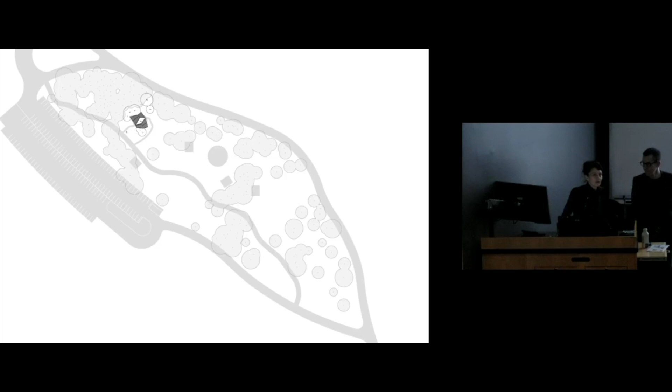We're going to start with that, because a lot of our projects—and we'll show you one of our house projects—often begin with the privilege of doing a pavilion that then turns into a house. So starting with House of Trees at Crystal Bridges Museum of American Art, we were given a site among, I think, 4 other firms, right outside of the museum grounds, near the entry.

When we went on site, the first things that impressed us were these very tall trees, in particular the one single tall tree in the middle—I'm not sure what kind of pine it is, but it's definitely a pine tree. We wanted to incorporate that tree into the architecture to create an immediate conversation between building and nature. All the other sites were more open, so this one was the most challenging since it was pretty dense with trees, and we obviously didn't want to take any down, as it was a temporary pavilion.

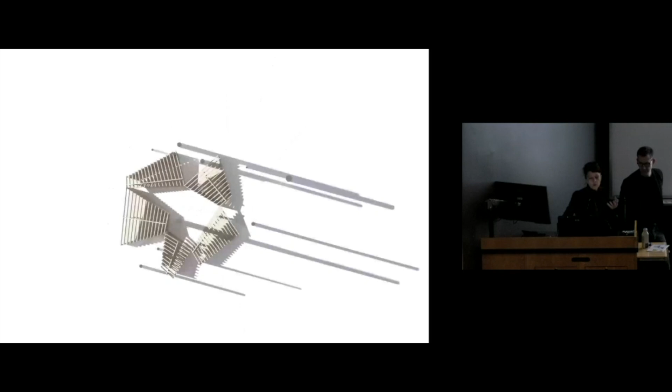So we mapped each one of the trees and then began to think about an open pavilion - that's the guy in the middle with his friends all orbiting around it. The other important thing, which we'll talk about with both, is that it was not only a pavilion amongst trees, but this integration of landscape and nature with domestic space, and it was also about using timber, local timber, which we'll talk about.

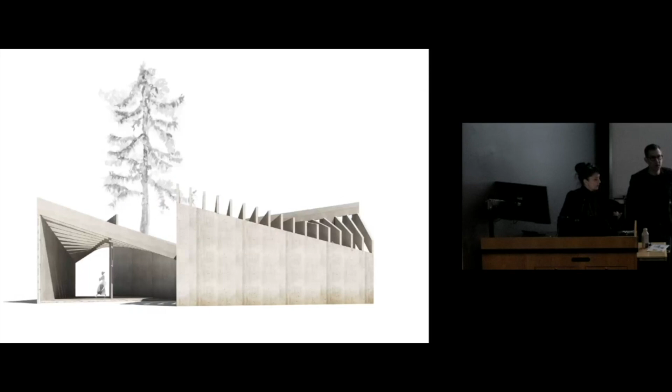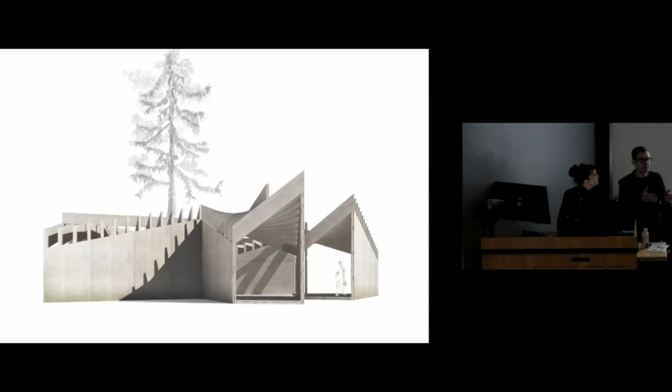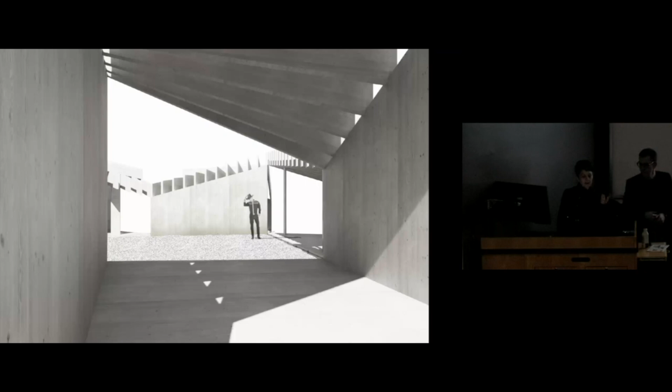These are initial studies of the pavilion, and we boiled it down to mass timber glulams, very deep, 24 inches tall, which may look familiar - we'll get back to that - and CLT panels, cross-laminated timber panels. So this combination between something slatted that filters light, and something flat that might receive a shadow, and they aggregate around a kind of open courtyard.

So this is the piece itself completed, the tree in its location and the pavilion wrapping around it. All the pavilions played with this ruled surface, where the two plates are at opposing angles, so the glulams create an implied curve as they move across.

We then removed certain CLT panels, removing the plate, and placed girders on top in order to hang the other glulams with these very skinny columns, creating a whole series of structural problems - in a great way, things to be solved.

So hanging girders versus bearing girders. We work with our structural engineers a lot, not just solving problems but finding the design potentials in the tectonics of supporting stuff. We love this - you'll see it throughout our work, and we're going to talk a lot about it today.

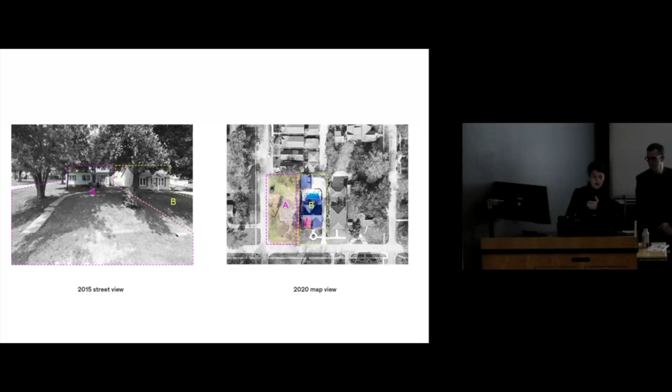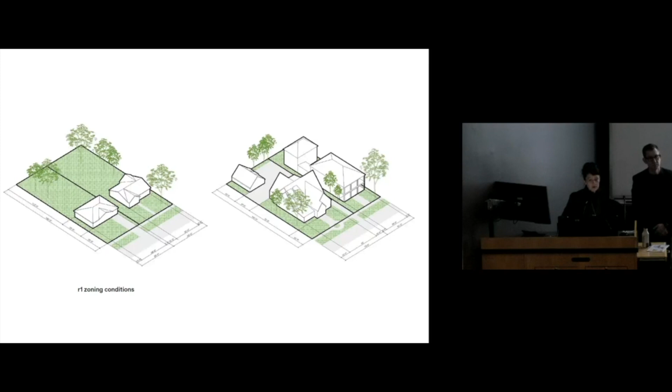We were really looking at this particular district, residential zone 1, seeing a single family house on a single lot. Then what was happening on the right was these very, very large houses being built. So you know what that means—it's slowly becoming unaffordable to be in this area of downtown Bentonville, which is walking distance to the center of Bentonville. The city's also been growing very quickly.

If you don't know what Bentonville means or was started by, it's Walmart—the Walton family that started Walmart. So there's a lot of economic pressures; it's an incredible center of wealth in what's largely a not-wealthy state. The Crystal Bridges Museum is also part of the Walton family.

So what we started to look at is the single family lot on the left, where as the houses get bigger, the cost grows. We started to speculate a different type of zoning configuration where you could take those same 2 lots, but once combined, begin to think about higher density—still low density in terms of the urban context—but where you begin to have different family configurations and densities occur.

One of the things we studied is where this settlement pattern of the single lot and single house comes from. It's a European model of land ownership. We looked at the Osage peoples who had inhabited this landscape before, who were semi-nomadic, farming, foraging and hunting, who clearly had a very different conception of ownership or non-ownership of the land.

We obviously couldn't propose that we would make a forager society in this landscape. However, we were interested in challenging this, and we thought about how we could perhaps start to mix this up, and also mix up concepts of ownership using land trust models of overall aggregated lot, block, and parcel ownership, counter to single family, single lot.

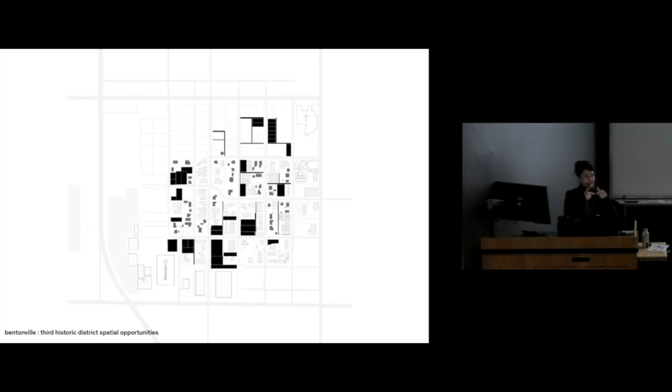One of the things we did is we looked in this third historic district that David was talking about. We started to look for opportunities, empty lots. We also found some very interesting alleyways that were not official roadways, but because if you start to combine lots and aggregate, you have to think of ways people can get to their unit, both vehicularly and otherwise, even for emergency access. So we found this crazy opportunity where there were these alleyways we could utilize if we started thinking about a new zoning configuration for aggregating.

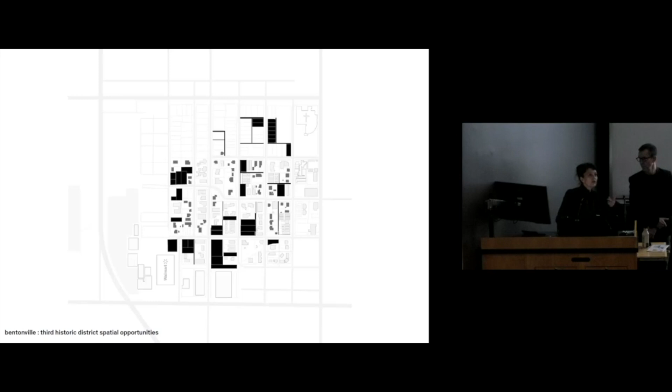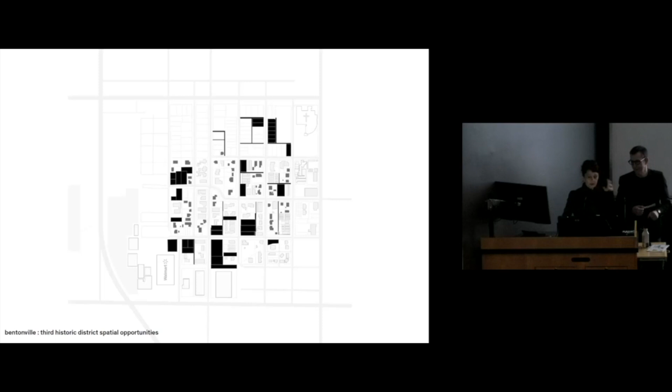Alleyways are obviously mid-block. They're not on this street structure that is, quote unquote, controlled. They're perhaps more free in a way, and might provide more opportunities for discovery. So we took videos and tons of photographs and began to map the neighborhood and find opportunities where there are these open lots.

Simultaneously, we were also looking at different family structures. We're in a different place, and the idea of the single family home and a traditional family structure is not the way we necessarily live now. So we were looking at different types of structures that could exist, and also just looking at the expected growth in Bentonville, their projections for 2035, and understanding the need that was coming.

Then we also looked at the vernacular houses, the single pen, the central hall, the 2-story, the dog trot, just as a way to understand what some of the local architectural tradition was. And then we began to think about prototypes.

And then, of course, composition—how do we apply design ideas to this? A lot of these are really riffing on the porch, or an interpretation of the dog trot house, with a lot of porosity and an idea of a courtyard scheme. And then, which we'll show you when we look back at the urban aggregation, the challenging of the sort of front and rear yards. So we did a whole series of models studying this sort of aggregation.

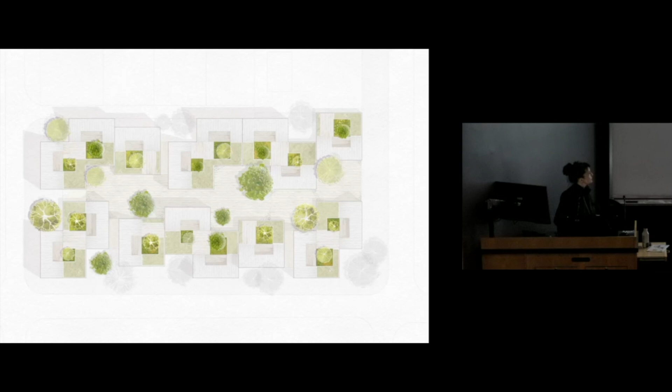The space is inside the houses in terms of courtyards, but then also the space inside the block as let's say private to a house versus public, in an inversion of where a yard may be and what a yard is and how it's used.

So in these prototypes of aggregated components, beginning with the square inside the square, we started to look at how single families, however they're defined, become separated, but the unit as an aggregated component gets put together, and then that forms an architecture.

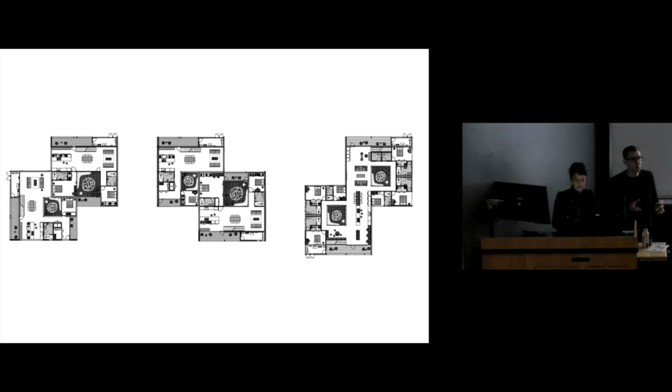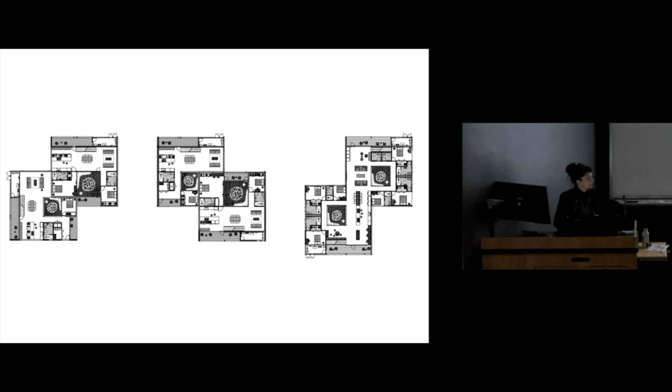And the two on the left here are two different ways of doing that within this system, and the model on the right is a full-on co-housing concept where people have individual rooms clustered around tree courtyards and then large communal spaces running all the way through the building and connecting to the street and then back into that courtyard you saw in the middle of the block.

One of the things we love to do in our models is use our model making methods as a feedback loop where we begin to consider construction systems. The construction system we were playing with and learning about when we were doing this project had to do primarily with cross-laminated timber panels, like you saw in the pavilion, coupled with glue lams for longer spans.

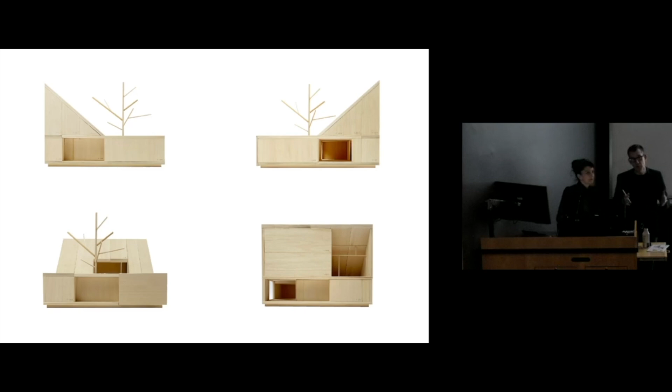Working through that—and we're working on this on a couple of different projects in our office right now—the reliance on CLT, we began to think it's a little too far, a little too expensive quite frankly, and too much of a usage of material. So hybrid systems where perhaps some CLT were needed for shear, glue lams needed for span, but even traditional stick framing, or deep straw-insulated or cellulose-insulated panels where one didn't need either shear or gravity, would be a lot more efficient and would even sequester a lot more carbon.

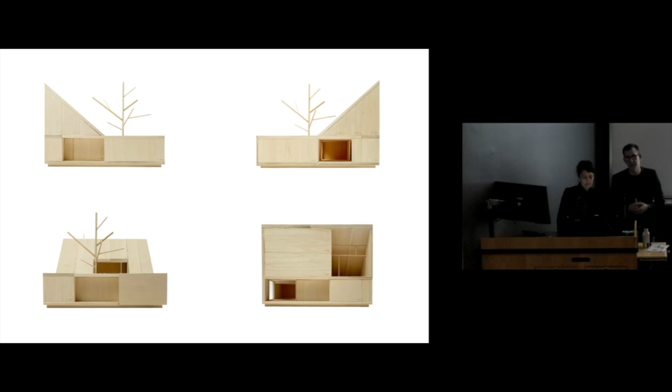So in this model, you can see the ideas of where the CLTs are, but then also the sort of furring systems where airflow would occur between the structure and the rain screen.

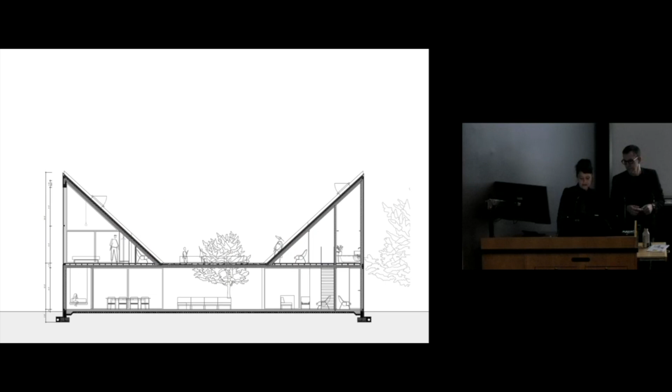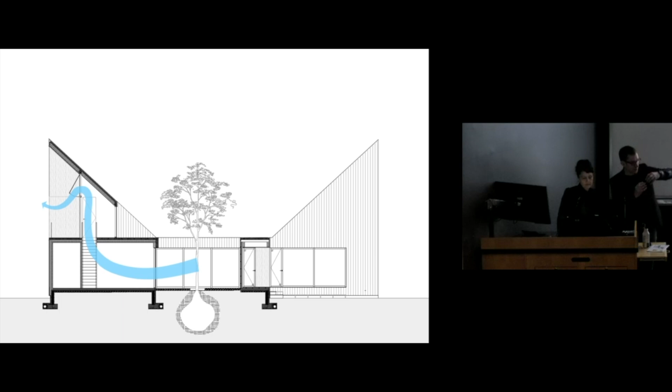And so you see that in the section, but I think the drawing really speaks to. So the airflow goes from the courtyard up through the building, through stairwells, through open spaces, up into this very tall second story space. So all the houses had this sort of pointy little, fairly large second floor space, kind of a wonderful space to be in.

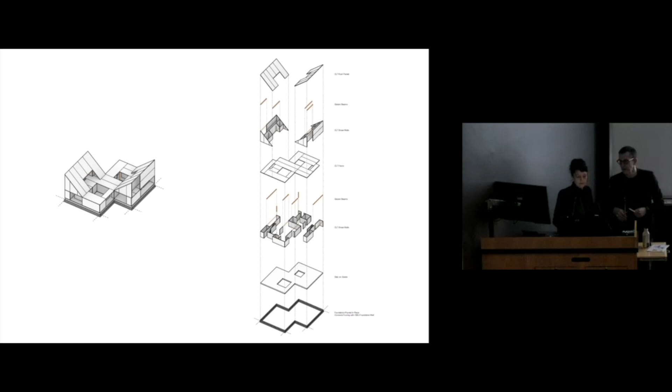And then this component diagram speaks to the CLT panel system. We even ran this by our structural engineer in terms of orientation of planks, length, maximum lengths versus typical widths of panels, where glue-lams are used, the types of foundations, which are much shallower in Arkansas than where we were used to working in New York State in residential projects, and roof and fenestration systems.

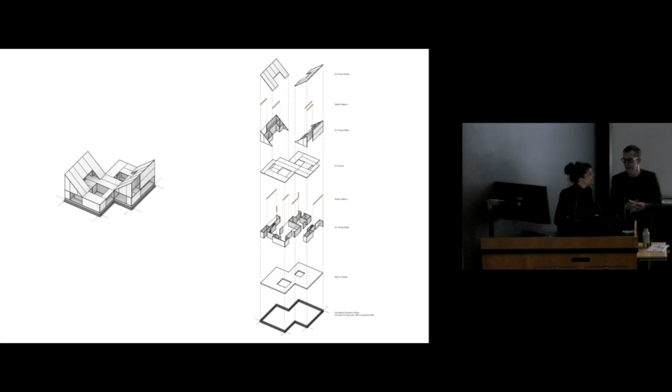And then these are just the final renderings or versions of this aggregation, which we'll show again in terms of the specificity of where they're located. But you see the interlocking, the idea of even shifting these off one another.

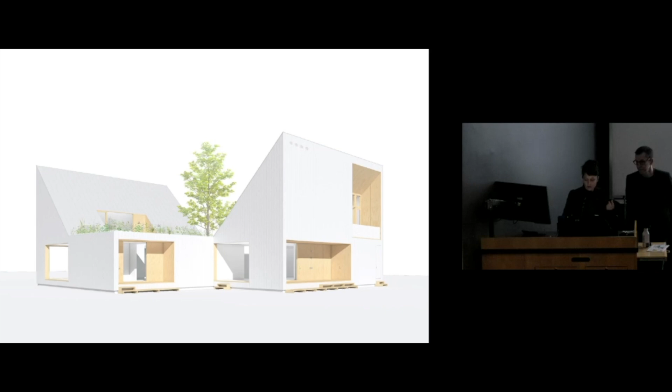We're going to talk a lot about variation of entry points, so that it's not just front and back, but multiple points that allow for individual experience of your unit. So these are just again images of the aggregation of these units, and you can see the entry porches and the upper level porches that take advantage of that cross ventilation with the courtyard.

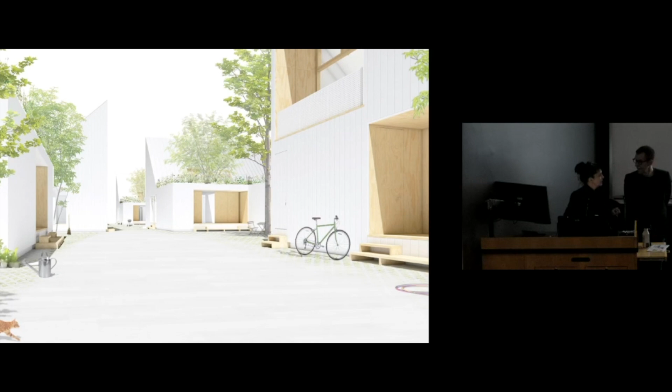And this is a really important point, and we're going to look at the site plan in a moment. But what's traditionally a rear yard, we've eliminated the individual lots, so this is a common rear communal garden, shared by these units. So it's a semi-private space. We'll talk about it when we see the urban diagram.

So the idea was, sorry to interrupt, it goes beyond the functionality of you live in a house here and you go shop somewhere else, or you have services somewhere else. The contention was you could mix up the zoning of the lots and the blocks. You should also be mixing up programming so that people have greater access, which enables child rearing and the elderly living in these communities, because they have much less distance to go for services.

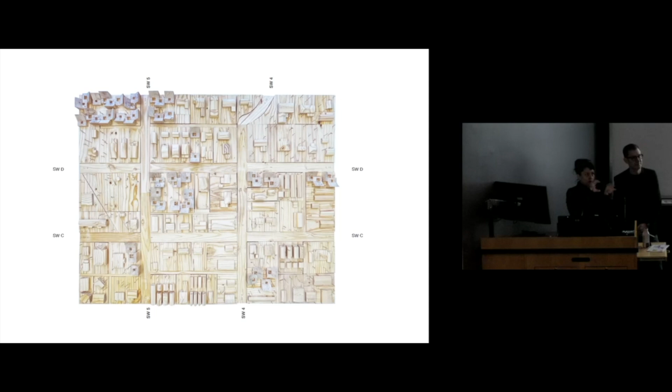We won't go into these in detail because I think we should move on. But as you probably saw in the video, we were literally swapping out, these are like puzzle pieces on a magnet, and we were able to swap these out and then look at this aggregation. You can see the common rear yard and then the different entry points, the different patio entry points, that allows for access but also creates variation.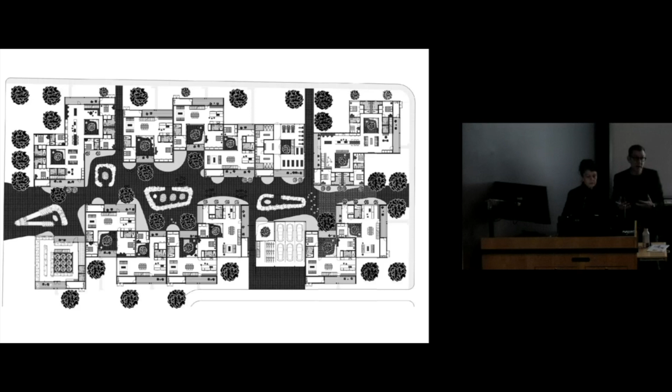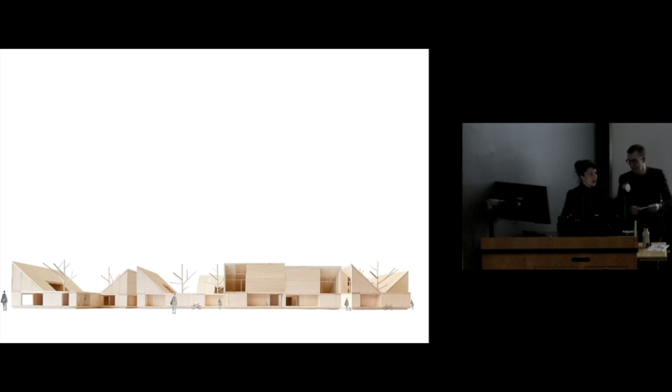The vibrance of gardens, communal gardens, spaces to hang out in amongst the buildings is as important, as equal weight as the design of the units themselves. There's housing, laundry, gyms, greenhouses - all types of programs considered and drawn into that. And then the different entry points, so it's not all frontal - because of the shifting, you can enter your unit off of the side. Then there's this rear yard communal space, and the interior where you see from inside to outside to inside to outside, which comes up a lot in our houses.

We're going to jump now to the complement to this - a deep dive into the 13 houses we've designed and built, and we're going to show you 2 new ones. One was at the very end of the book, still under construction, and we're sharing photos for the first time. We'll go quickly through the ones that are in the show since you can see those, and talk about the ones that are new and exciting to us.

As mentioned, the whole idea was there's not really one way to design a house. It has to do with site, climate, materiality. This idea of comparing 13 houses, 13 sites, all on the same site model, but looking at the topography and the relationship of the house to the site was an important aspect of the book. There are different essays that take the house apart - doors, windows, steps and stairs, structure, house plants which have to do with nature - all part of this comparison of the 13 houses.

This is just a comparison of the houses. You can see from the very, very tiny one in the middle to the largest house we ever designed right next to it. It's fascinating to see the scales of occupation you can take on as an architect.

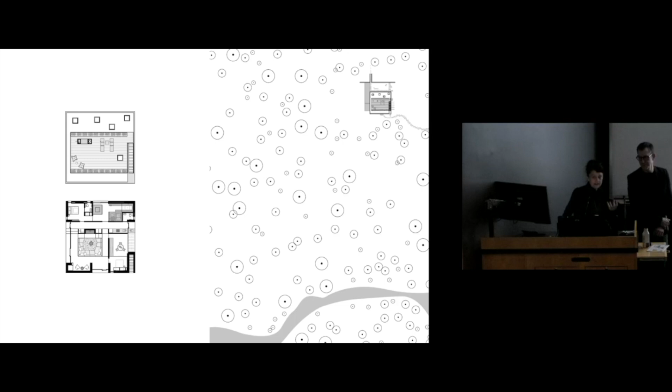This is really a planimetric diagram of the house. One thing we're really interested in is the informality of a lot of these houses, where you can enter from any room. This house doesn't privilege one side or another - you can enter from any facade, and because it's a square, there isn't one side that's more important than the other. This is part of Thick and Thin, where on the drawing to your right is the detail in the wall section. We had a lot of fun devising our own hatches for the different materials to create an expressive representation.

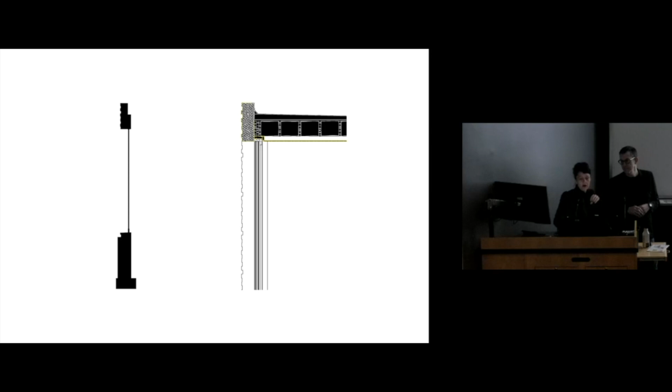We're fascinated by modes of representation, and we wanted to dig into what is in those thick and or thin walls. So it's concrete board-formed concrete, but then with a wood roof.

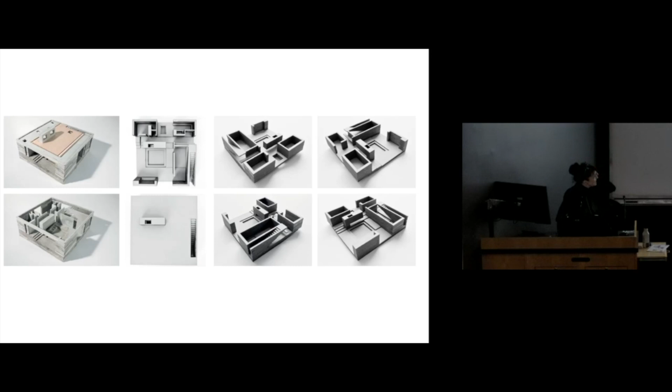The chipboard was first a positive, and then it became a negative, so that we could cast against it, and then it turned into concrete, and became the positive that then required a different negative in order to form it.

This idea of even the bedrooms, everything, every door, every area that we think is a window is actually a door, including in one of the bathrooms, and then stairs that go up to the roof. Having concrete be both an interior and exterior material as much as possible. But where you see up at the ceiling where that was wood framing, that is sort of plaster and sheetrock.

House of One Shape came out of, actually, this is a house up in Hudson. This came out of another pavilion that we did that was based on a right trapezoid that was called Zoid. We were designing the house at the same time that we were building this pavilion.

Here's another sort of obsession with the courtyard. A lot of times we use the pavilions as a way to think through the project. This is the diagram of this house, a series of right trapezoids that mirror and nest, and each one is a different room. So there's an outdoor patio, a kitchen, a living or dining room, and another patio. It's very much about an interior and exterior relationship.

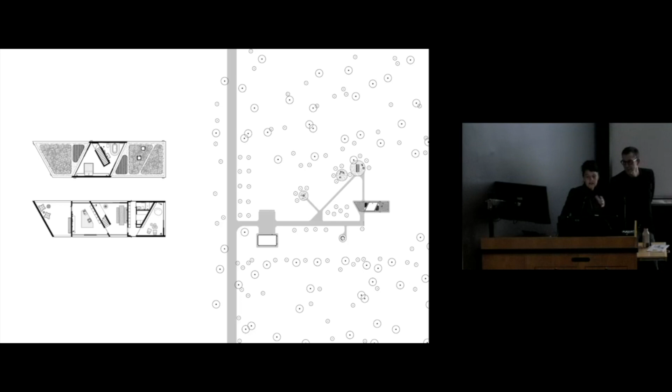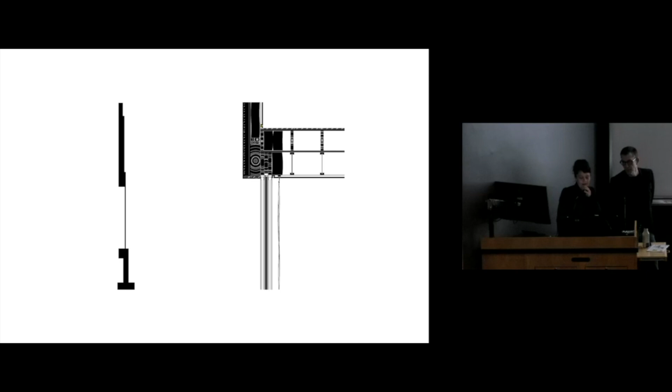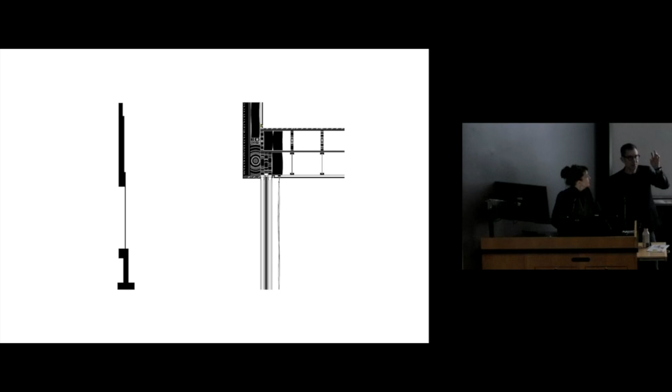And here again is the thick and thin. This is a wood structure with stucco. It's all wood, there is no steel in this house. The second floor has a second layer for both airflow to the upper floor, meaning HVAC, as well as to accommodate a planted roof and the sliding doors going right out to it. So you have to get high in order to keep things low and waterproof.

So this house has stucco on the outside, but as David said, it's all wood framing. It's also lighter, it sits on the landscape lighter. It sits a little bit up, as opposed to the square house that's set into the ground. These are also additional models.

The house is, as Stella said, a series of right trapezoids, and then has a parallelogram on the roof that you can see in this image here, that touches down on the structural points of the right trapezoids below, with a stair coming up in the middle that then creates two triangular rooms. So there's a series of geometric calibrations and manipulations going on in the house that create idiosyncratic spaces.

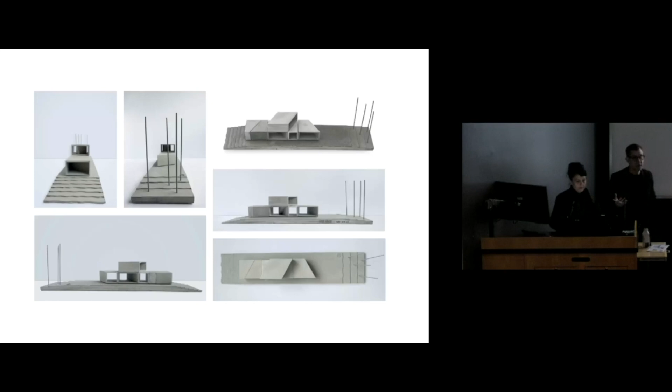The fun of that, of course, is going from these concrete models into actual usable and pleasant domestic space. You can see these plans in the book or even in the exhibition, so we're not going into too much detail.

But the idea was also to have the whole interior be lined with plywood, and only the areas that are wet or exterior, or in the case of the fireplace, had a cement board. Otherwise everything, wall, floors, and ceiling were plywood, and then just the openings of the right trapezoid for each space.

House Without Walls is in Hillsdale, New York. This was very much about the theme of a pavilion. A lot of these projects are, and we're going to talk about that in some newer projects that we're going to share with you. So really thinking about what's the most reduced form of domestic space, just shelter, right? A roof and columns.

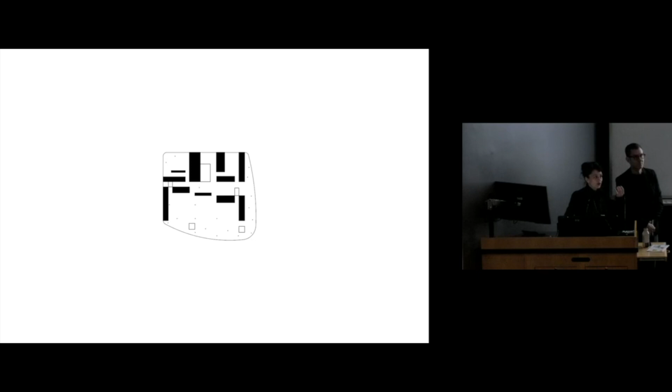And so we thought of this roof with the columns in a series of volumes that ended up just being either bathrooms or closets or kitchen, that then kind of had a loose pattern. It was sort of like a Mondrian painting, where you get the different marks—in this case the different volumes—at 90 degrees in this sort of open pattern. So we said it's a house without walls, because it's really just crates or volumes, but no singular sheetrock wall. So the material is the same on all sides.

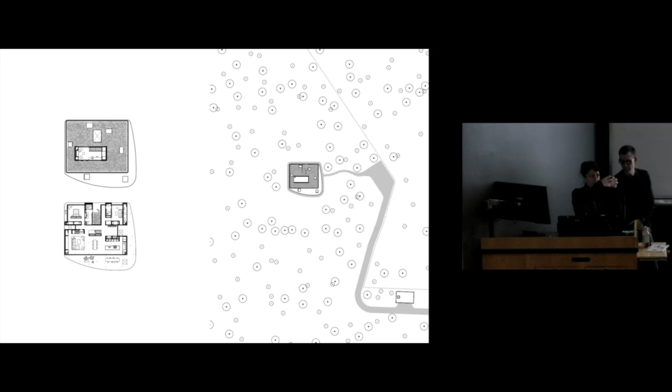And it allows the material to be the same on the inside and the outside. It just looks like a series of boxes under a roof. So you can see that in the plans and the site plan. In this case, here's the thick and thin drawings.

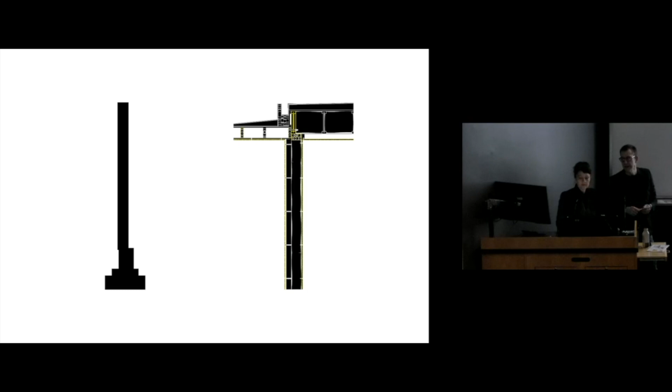This also accommodated a gutter system, a very skinny roof for the patio covering against the thicker insulated roof. The plants—we refer to this as the sponge on top. With the addition of the plants, there's an R value that's incalculable past just the insulation. I suppose we could calculate the soil, but the inspector wouldn't take it into consideration, which is unfortunate. Which is fine, because we met code.

We exceeded code. So the diagram was about this roof, and there were skylights both inside and outside, so again not really differentiating between exterior and interior, and the series of columns. Going back to those initial ideas we were talking about in the House of Trees pavilion, using structural tectonics—the expressive nature of structure—as design drivers and as design inspiration here.

We just love these ideas of pavilions being held up with these skinny columns. Everything, in order to make that happen, has to happen in the roof, and it has to happen in the ground. So we're resolving those forces above and below, and kind of deciding what we're showing and what we're not showing. In this case, we chose not to express where those connections are made, in order to prioritize the space.

And the movement of the columns around those patio spaces, much like you would feel when you're walking through a forest with very tall trees. And there's going to be a relationship to that with a new project that we're going to show you.

So as you can see, we do a lot of model making as a way to understand that process. And you see the aggregation of skylights—some are completely open holes, some are glass skylights but in exterior spaces, and then some are skylights over interior space. So we really like the idea that this roof covers both interior and exterior spaces.

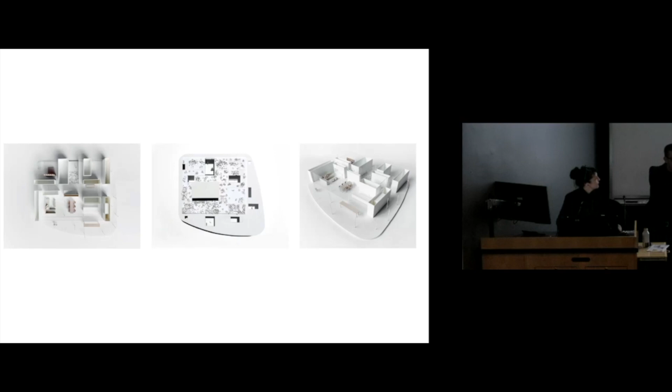So you're seeing the patio roof as the overhang here, but wherever you see the plants, that's the conditioned space—that rectangle is the conditioned space. Using that as the insulation allows us, at the patio, to keep it very, very thin, so that when you view the building, it perceptibly looks like an incredibly thin roof. You see that on the image on the left. On the image on the right, you see a little bit more of that thickness, where the overhang of the sponge is less.

So here you actually see this taken a little bit higher up. It's the back side of the house where there's not a covered patio, and you see that planted roof. We've used that in several of these houses, as David said, as a type of insulation.

And then just really bringing nature in as much as possible. Here you see there's a hole in the roof in the upper right-hand image, as part of that courtyard—so that's also a skylight, not just an opening. You're seeing the material outside is identical to the material inside, so that these boxes read as discrete elements pivoting at 90 degrees to one another, infilled either by glass or space.

No walls. So now we're going to just show you really quickly two new projects. One is—we're calling it '3+1 Ways of Looking at a Pavilion.' So it's kind of continuing this conversation we just had with the last project.

This one is an addition to one of the first houses we did, which is in the book. We're not going to talk about that house, but the clients came to us and asked us to create three new structures: a garage, a studio, and a pool house with a pool. So three separate structures.

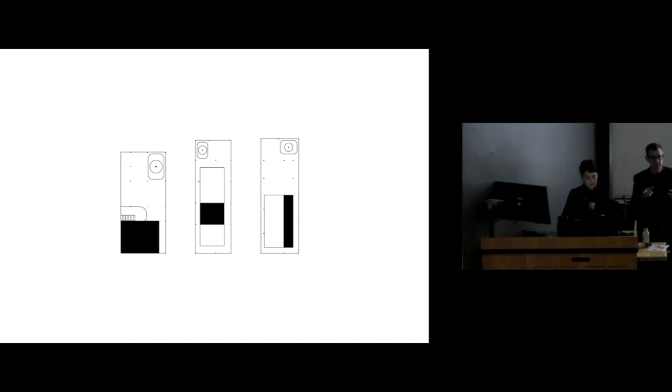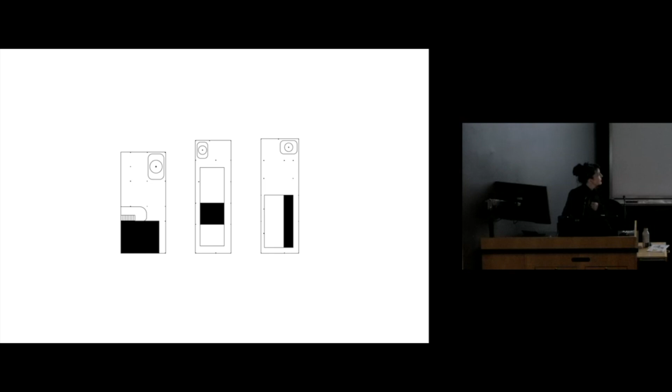The idea is there are enclosed, conditioned spaces that you see in black, against spaces enclosed by glass that are also conditioned, shown with the light lines around the outside. Then the lines around the outside of those are the roof extensions, with trees in holes in the curved shapes inside.

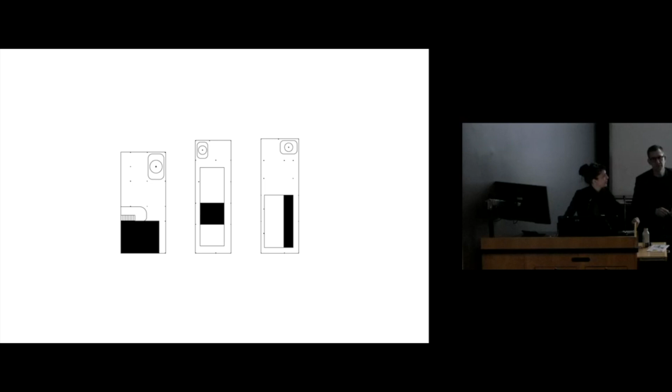You'll see, this is the site plan. You're going to probably have to point. Oh wait, we got a laser. Dick set us up with that, we have to thank Dick Smith for his help on the show. Wait, maybe, I don't remember where it is. Here, I don't remember. Okay, alright.

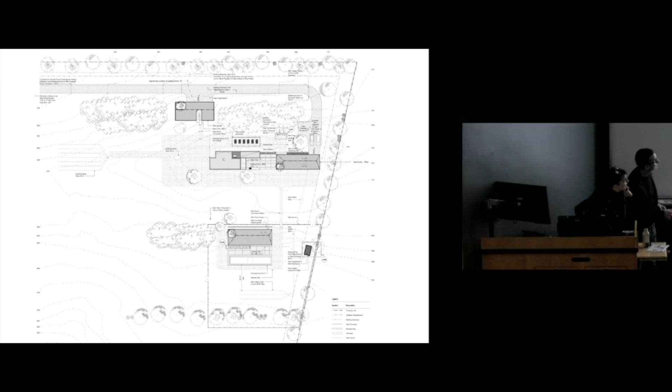That's the original house, which is in the book. But then we have three pavilions that we've added: a garage, a studio, and a pool and pool house. So we're going to go through each one, and they're each a pavilion.

The top was the garage, the middle was the study for the studio, and the bottom is the pool house. We were looking at these different pavilions with a very similar concept: a very thin, flat roof, thin columns, and then some kind of conditioned space underneath that gives you a protected, sheltered space, similar to the last house.

Similar to the last house where you saw the skinny white columns holding up the roof. Those were circles. These are squares and rectangles, and I'll get to that in a moment.

All of the columns, most of them, are pulled to the perimeter. So all the buildings have columns at the perimeter, which is a very different structural condition than floating a roof with columns pulled in from the edges that then have certain degrees of cantilever. There are no cantilevers at all in these.

Because the columns are so skinny, some had to be rectangular to resist certain lateral forces, and most were 2.5-inch squares supporting the roof and tied into foundations. We've worked with the same engineer on most of these houses, and sometimes we'll say it's really important that every single column is the exact same dimension, which is hard because different areas of the house take on different forces.

Other times, like with these pavilions, we're fine with a column having a greater depth in one dimension, because it's a little bit didactic. It's subtle, but if you notice it, in this case we celebrated that difference.

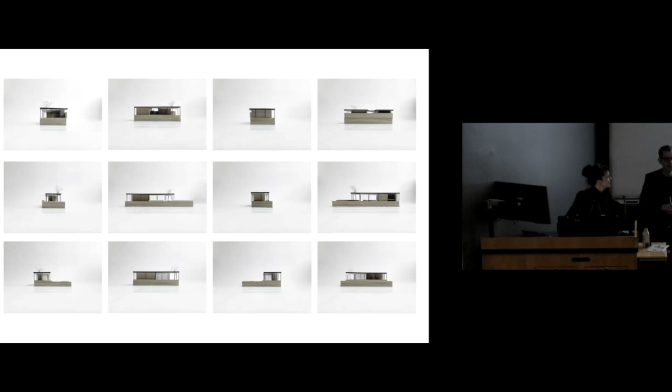Other times, like at the Y-shaped house, the largest house in that lineup, all the columns had to be the same, and literally one column drove the size of all the other columns, and I've never stopped regretting it. So we do stuff and then we change our mind, and then it's like, why did we do that?

So we'll go through each pavilion quickly, and we're going to show you construction photos that are only about two weeks old.

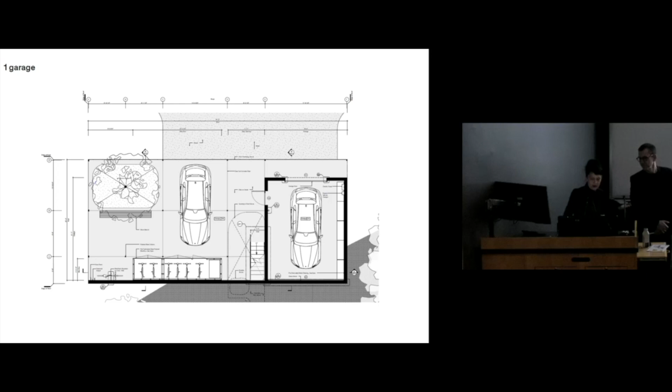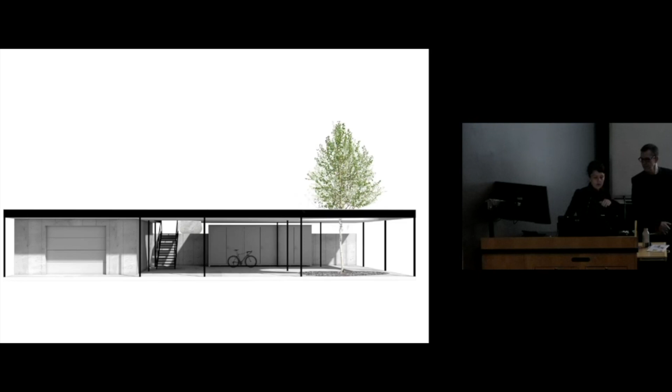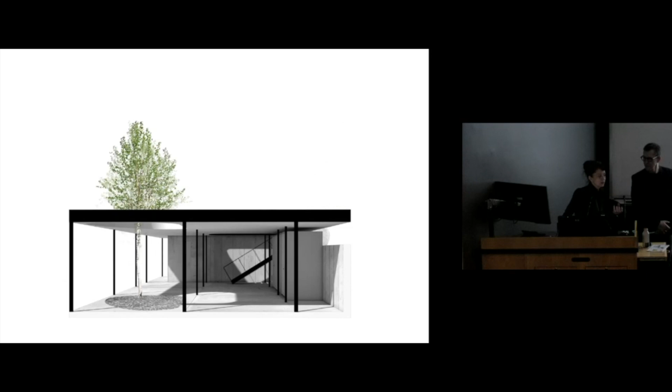This is the garage. It's housing one car, and the rest is a roof supported by columns, with a carport, and a hole with a tree. These are the renderings, showing the volume of the garage itself, steps going up because it sits within a section, and a kind of open carport, patio, or place for bikes. And this hole with the tree shows our obsession with trees being part of the project.

So I was noting the section. This is looking at it from another view where the roof is very thin, and these are the construction photos.

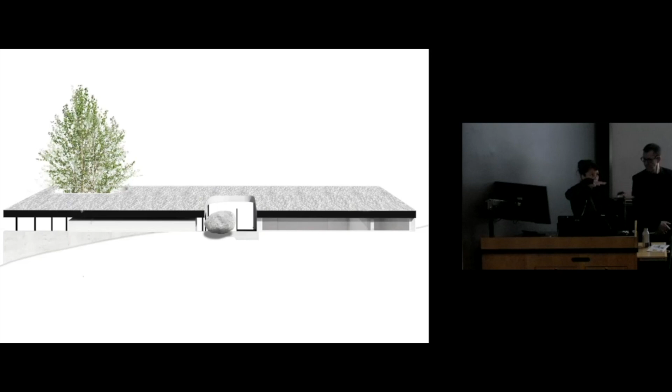This is the exact same image, but because of the landscape of the whole site, these pavilions are in different locations, and the garage is the lowest. So when you're up at an upper level of the other pavilion, you see the roof like this, which is what you see here in construction.

Because once the roof gets all the way out there, it wants to start swinging like a sail in the wind. So once again, the way the columns are tied into the ground and the foundation, and the roof structure, is critically important.

We tend to drive the contractors crazy, but it can't be done any other way, because if it's not done exactly per engineering, the roof's going to fly away.

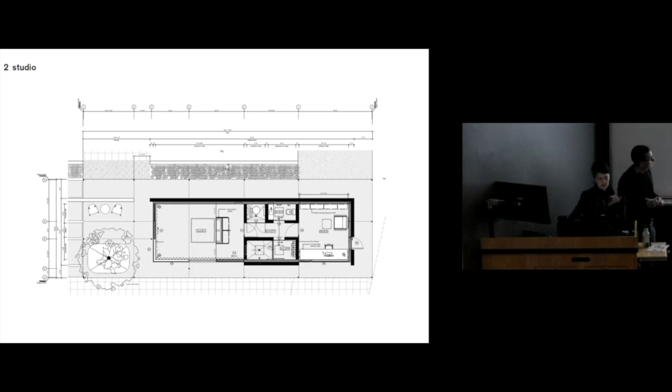So then going to the studio, which is the middle one and adjacent to the existing house, this has a central area with infrastructure for bathing and mechanicals, an office shown on the right-hand side, and an open studio, which now doesn't have the Murphy bed — it's more of an open studio space.

Do you want to talk a little bit about this? This is very similar to what you were just talking about with the house with no walls, in terms of these details that incorporate the wood framing.

2x8s — I don't think anything is bigger than a 2x8 in the roofs, in order to keep those roofs as skinny as possible. They always get thicker than you want them to. So we either accept that and detail for it, or we play, like in the house without walls, a kind of sleight-of-hand game where you make it very skinny, but perspectively you don't see up to the thicker roof.

But we couldn't do that here because you see these roofs at different levels. We did have an opportunity though, because in most areas of these roofs we don't need to worry about insulation, certainly not for the garage.

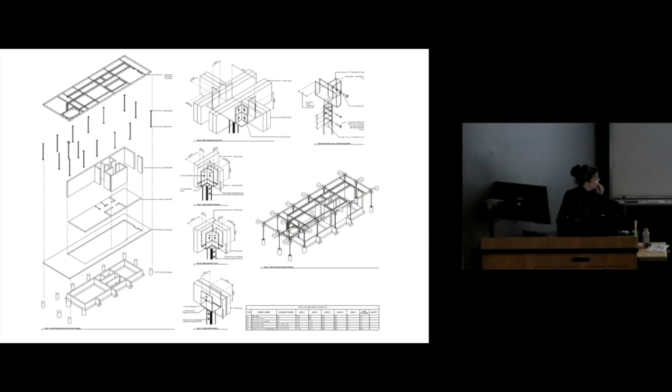We spend a lot of time on how these columns are bolted into the foundation — a lot of time with the engineer determining where the rebar is, and a lot of time with the contractor telling them to move the rebar, because it often goes in the wrong place and needs to be put in the exact right place to tie in with the bolts coming from the bolt plates and the columns above. This all happens beforehand, and it's critically important that we're on site as part of that process with the construction.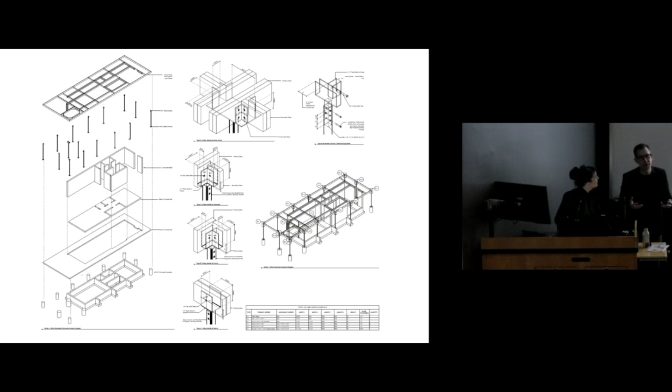Just to note, all of these houses we're showing are in the Hudson Valley, so they're two hours north of New York City. We're in a similar climate along the northeast, but it's a bit more severe climate, so our frost depths are lower.

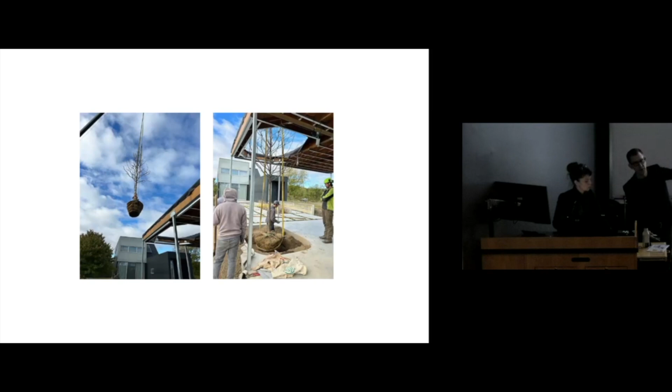Just trees going in. Yeah.

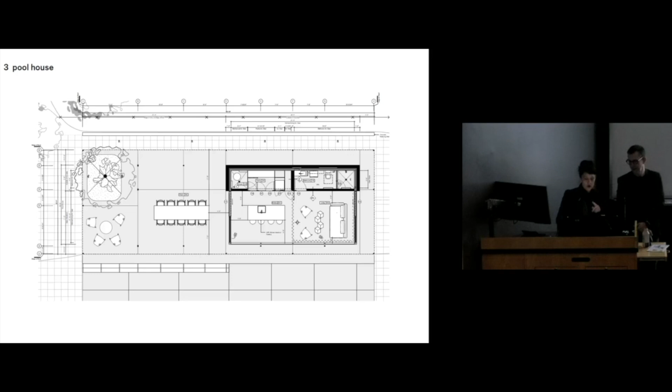The third pavilion is the pool house. The conditioned space is the volume on the right, which has bathrooms, a small kitchenette, and a living area, and then a large open patio and outdoor dining area, again with the hole for the tree.

These are similar details, so I don't think we need to go through them.

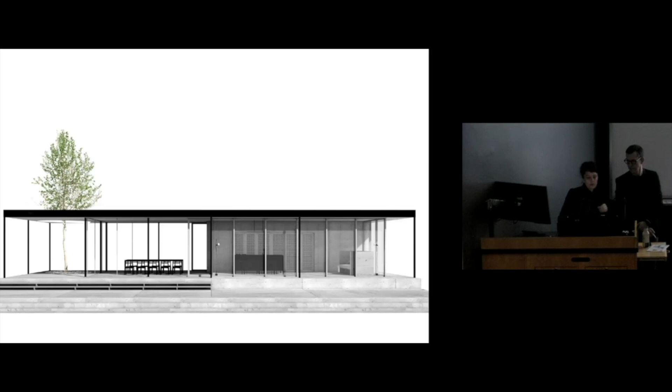Here again you see the pavilion, and you can see that it sits lower, and then you see the studio pavilion a little bit off to the right. Looking at these openings, each one gets a tree as part of that outdoor space.

So the whole project is really about this perception of a building from being within it or outside of it, and seeing the other buildings also in relation to the original house.

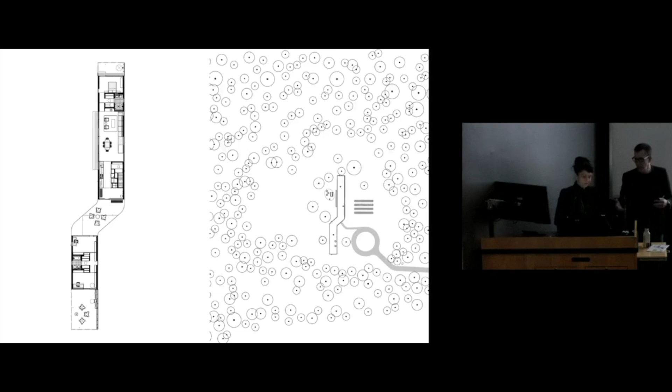These buildings we're talking about are all very pavilion-like. They incorporate the outdoors very integrally with the overall organization. Like Estella said, outdoor, indoor, outdoor, indoor, outdoor. Those are really important organizations for the way we think about buildings.

So you see again this sort of play on this—sometimes you get cold when you walk outside. Here the columns are actually moving to where they need to be. They're not on the edge and not on a grid in the center. They're drifting based on what the needs were from a structural standpoint.

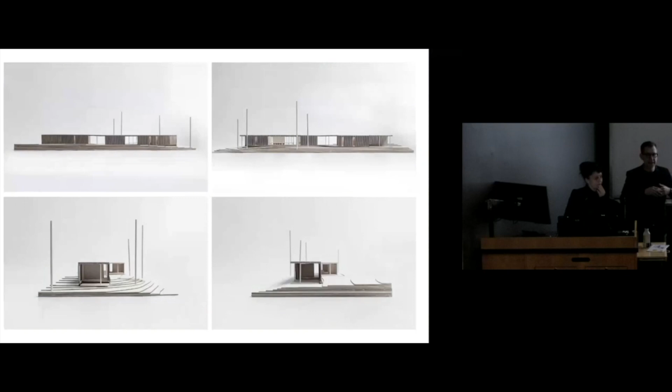This is actually in that breezeway area. We thought about whether we wanted to make that a clear span all the way across. We really loved just using 2x8 wood framing in that roof and a couple of skinny columns, and that's all we needed. We decided to celebrate it instead of going for a heroic span, which would require steel.

For economy and expressiveness, we really enjoyed using the columns. We've had other architects say it should have been a clear span. Steven Holl came to the house and said, oh yeah, why'd you do that? And we said, because it's cool, Steven.

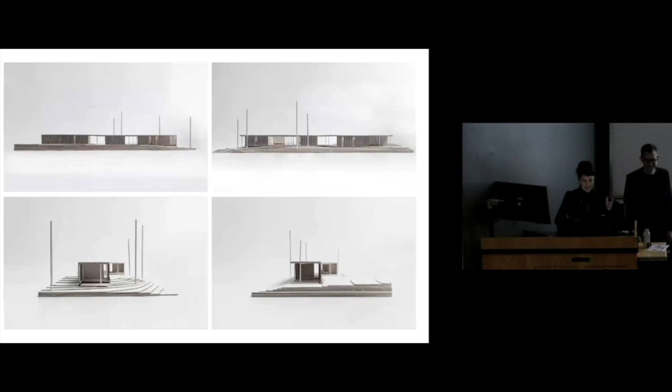Again, the models, and looking in this case at doing cedar siding in vertical strips. In certain cases, the siding is pulled apart to create a screen-like effect. This is the end patio that is open to that second volume, and then you see the shift of the swerve.

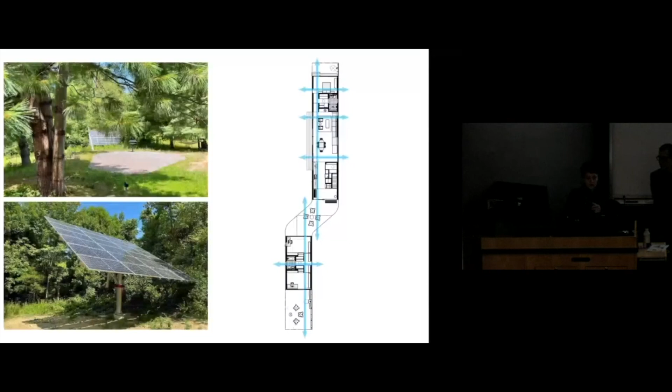So here are just other images of the house, talking about this materiality. Again, all of these houses, it really is about the siding. This one doesn't have a tree in the house, but a lot of the swerve came not only from mitigating the length, but there are these two amazing, three trees right near the house, and we placed the house as close as we could to those trees.

The interiors have a concrete slab that uses radiant heat driven by the geothermal system, but also all of the walls are lime plaster with no plasticizers. There's no paint on the walls—the color is integral. The plaster is its own thick troweled surface. It breathes, it cleans the air—it's a phenomenal surface that operates directly against the use of sheetrock.

We often paint with latex paint, which is simply plastic, so we're really getting away from putting plastic in our buildings that makes us sick.